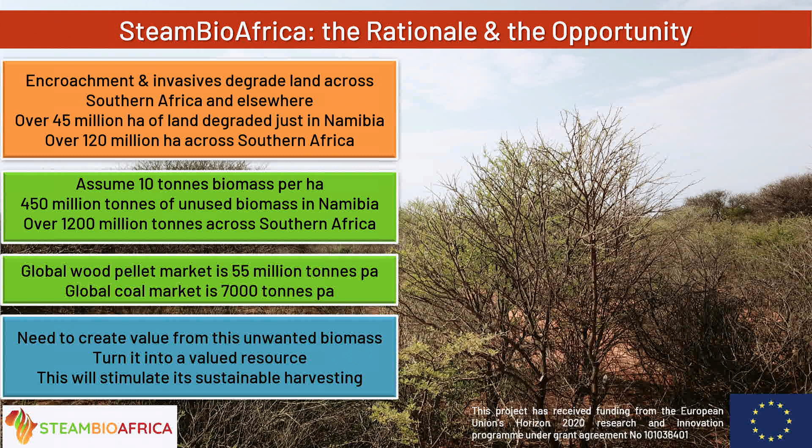So the challenge presented to us, and why we were approached, was can we stimulate the harvesting of that bush? Because at the moment it's a cost, and what we wanted to do was create value from it. That's where this project has taken us forward.

So looking at the situation now in Southern Africa, coal is the primary energy source. It's an unreliable status, it's not very environmentally friendly. There's a lot of rural unemployment, social inequality, encroachment problems, invasion problems, and nothing's actually dealing with that.

So what do we want to do? We want to turn a problem into an opportunity. Now that sounds a bit twee, like out of a business school, but it's a real, genuine thing. We want to turn the problem of the unwanted biomass, the encroacher bush, the invasives, into a clean, secure fuel that can create jobs and address poverty, and we want to do it in a way that benefits society as a whole.

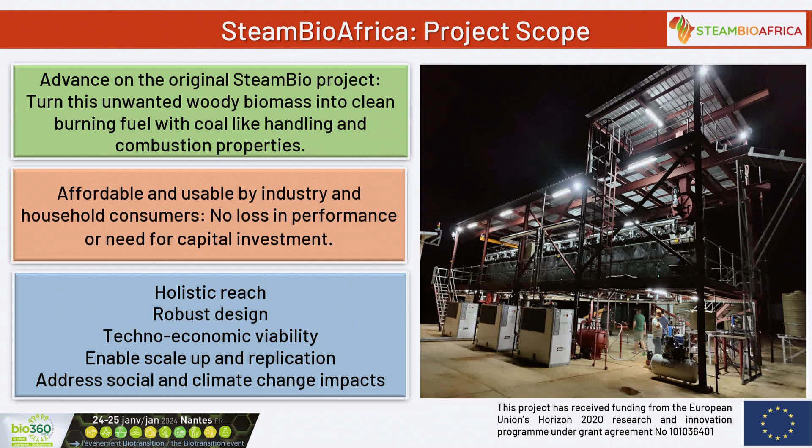So how are we going to do that? We want to take the original project forward. We've built that unit - it's a demonstration unit. We're looking at it not just to prove it on a techno-economic basis, we're looking at full sustainability. Do we leave the land in a better place than it was before? Do we create social benefits? Can we do a good thing environmentally? So very much a holistic approach in this.

If anyone's been involved in an EU project, you have your work packages, all very great. I could go into the details on that, but I think we've all got a limited lifespan. Core things of what we are doing now, other than proving it on all the various aspects, we are currently...

...turning our prototype design into an industrial scale replication. We're talking about taking a system that's currently 250 kilos an hour, which gives an output of nearly 4 tons a day, into a system that can operate at 2 tons an hour as a first commercial deployment. We're also looking at the full business case so that we can roll it out, secure investment, and take it forward.

And this is what it looks like - a nice little demonstration at the Cheetah Conservation Fund site in Namibia. Wonderful place to visit, wonderful to see the cheetahs doing their morning run, hurtling around the park. Really lovely place, but also you see firsthand the level of encroachment because you're in the middle of that encroachment area.

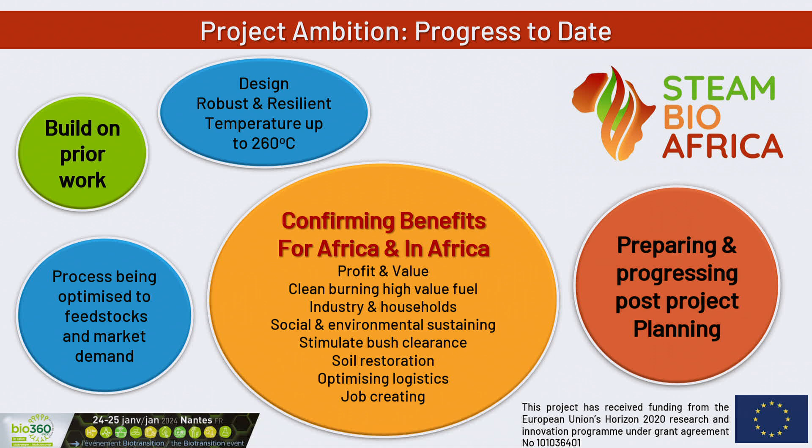So where have we got to? We've built the unit, we're demonstrating it, we're optimizing it. Within the next 6 months we'll have produced over 500 tons of material. That will be demonstrated and validated in communities in South Africa, Botswana, and Namibia. It will also be validated with industrial units - a cement works, a copper mill, and factories, particularly in southern South Africa, who are using coal - and validating it. We have a good relationship with a major manufacturer. We're looking to progress what we're doing into commercial scale rollout.

So what's next? Continue producing, get our 500 tons produced to test, prove that the economics stack up. Lots of people talk about having a great plan, but we actually produce a business case. One of our partners is owned by a green investment fund that's pulled down $60 million US dollars - not Namibian dollars, I should add - in investment in new capital, green capital projects over the past 4 years. We're developing plans for post-project scale-up.

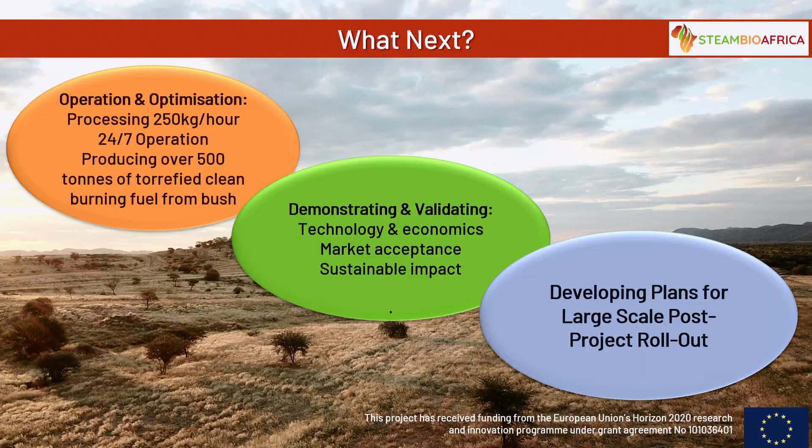As with anything in an EU project, we're looking at quite a few partners - 15 partners, 2 continents, 8 countries, researchers, academia, industry and entrepreneurs. We're all doing fine and everyone's happy with each other all the time... well, not really, but we're working, challenging, and addressing the things. It's a complex piece of work and I think we're getting there.

Thank you. And if you want any more questions, please visit us today or tomorrow at our stand.

Thank you for this very good presentation. Is there any quick question, or should we leave that for a discussion at the end? I can't see any. So, Gang, if you will, continue.

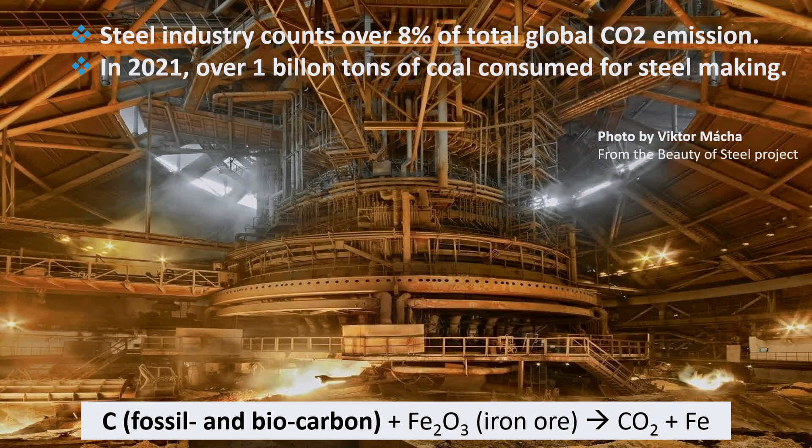Steel industry is one of the most difficult industries for decarbonization. Carbon, especially fossil carbons, is used as a reducing agent in the steel-making process. In 2021, over 1 billion tons of coal was consumed in the steel-making process.

Free allowance in the emission trading system is phasing out for the steel industry, and the carbon border adjustment mechanism has just been implemented since October last year. Those will drive fossil carbon cost to increase dramatically.

Hydrogen can be used to replace coal and coke for steel making. However, converting a conventional steel mill to a hydrogen-based mill will cost 3 to 7 billion euros. So this is happening, but it will take decades. The urgency is already here, so the industry needs a more cost-efficient solution right now.

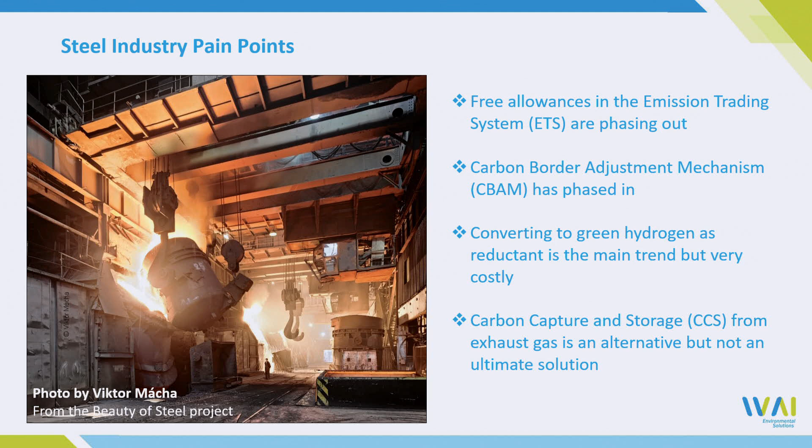Our solution is based on biocarbon. Biocarbon is made of forest residue. Forest residue is one of the most abundant carbon sources on Earth, and it has not been well utilized.

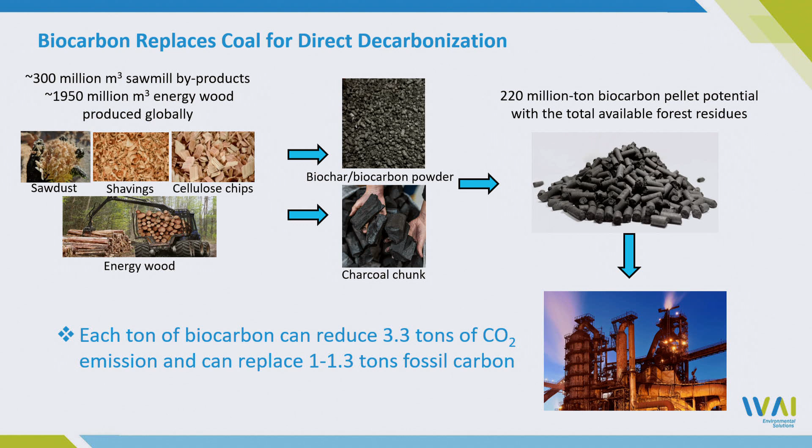Using pyrolysis technology, we can convert forest residue to biocarbon and then use our formula to produce biocarbon pellets. Those pellets share many similarities with fossil carbons, and steel makers can use biocarbon to replace fossil carbon directly in existing facilities without involving too much infrastructure change. One ton of biocarbon can replace up to 1.3 tons of fossil carbon and reduce 3.3 tons of CO2 emission.

First, let's see how fossil carbon is used in the steel-making process. In blast furnace, which accounts for nearly 80% of iron production globally, PCI coal and charged coke are used as reductants. Each year, there are over 900 million tons of fossil carbon used in blast furnaces. For each ton of steel made in blast furnace, average CO2 emission is 2.5 tons.

There's another mainstream technology called electric arc furnace, which accounts for 22% of total steel production globally and 40% in Europe. Since electric arc furnace mainly uses scraps as feedstock, it has a lower CO2 emission than 1 ton per ton of steel. But in total, it still requires 6 million tons of fossil carbon per year in electric arc furnaces.

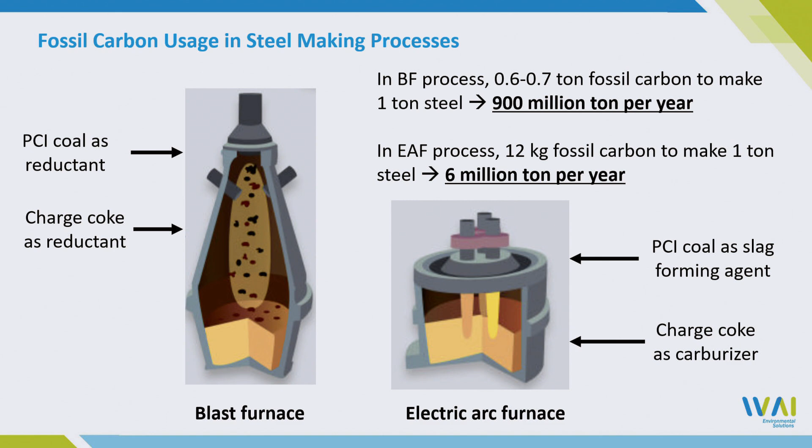If we look at the entire metallurgical industry, steel accounts for 95% of the market size. The other 5% is for ferroalloy production, and many ferroalloy production processes cannot use hydrogen to replace fossil carbon due to thermodynamic reasons. They have to use solid carbon in processes such as ferrosilicon, ferromanganese, ferrochromium, and aluminum production.

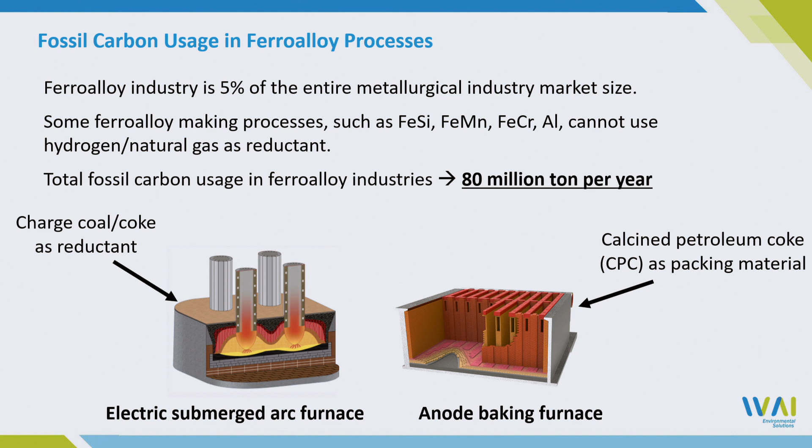Coke and coal are used as reductant. Calcined petroleum coke is also used as a packing material in aluminum anode baking furnaces. So in total, the fossil carbon usage in ferroalloy industries is 80 million tons per year.

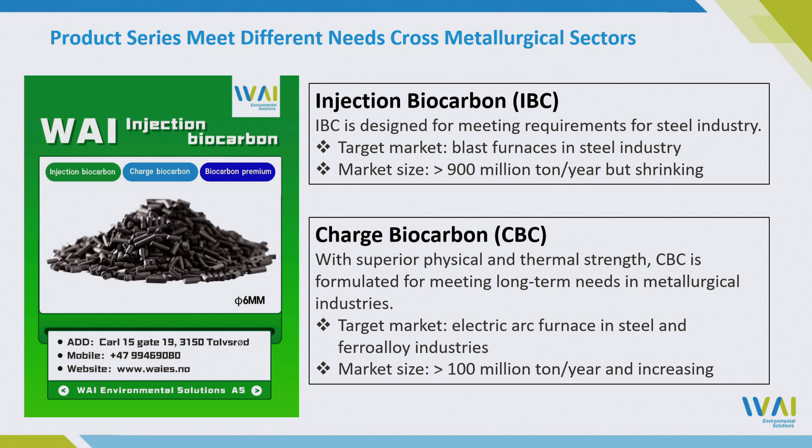Based on what the metallurgical industry needs, we have developed two different products. One is injection biocarbon, mainly aiming for the steel industry for PCI coal replacement, and the second one is charge biocarbon for charge coal and coke replacement in both steel and ferroalloy industries.

For blast furnace, we can use injection biocarbon and charge biocarbon to replace a small part of fossil carbon. But in electric arc furnace, we can use injection biocarbon and charge biocarbon to replace 100% of fossil carbon.

For ferroalloy industry, electric submerged arc furnace, we can use charge biocarbon to replace fossil carbon, and also use charge biocarbon to replace calcined petroleum coke in aluminum anode baking furnace. There's one bonus: if we use charge biocarbon as a carburizer in electric arc furnace, then 70 to 90% of carbon will stay in the steel for many, many years, which makes it a carbon storage technology.

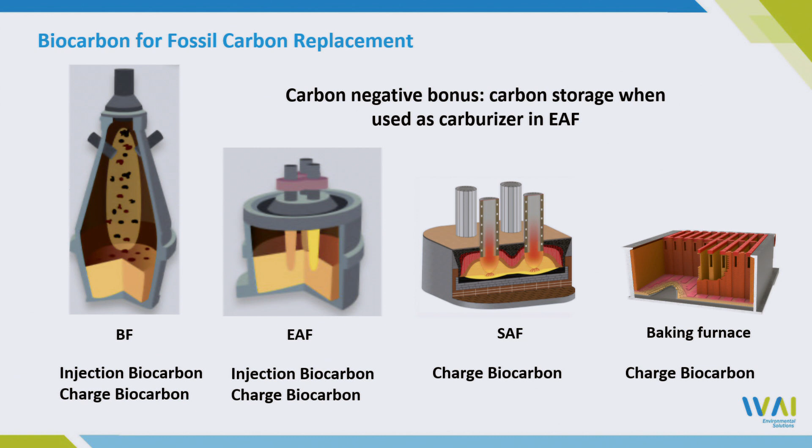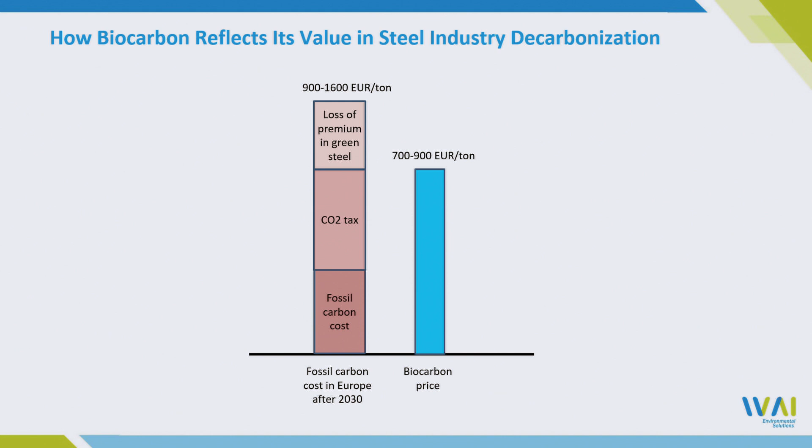Biocarbon will be more competitive than fossil carbon in the near future. For steel makers, they will benefit first without using fossil carbon, which is typically imported from another continent. Second, they can avoid paying CO2 tax. Third, they can gain premium price for the green steel they make with biocarbon.

CarbonWorks is our trademark for biocarbon production facility in Norway. In CarbonWorks, we convert forest residue to biocarbon via pyrolysis technology, and syngas is burned and the heat is recovered as steam and hot water, so we can supply excess energy to a neighbor factory or a district heating network as a second revenue.

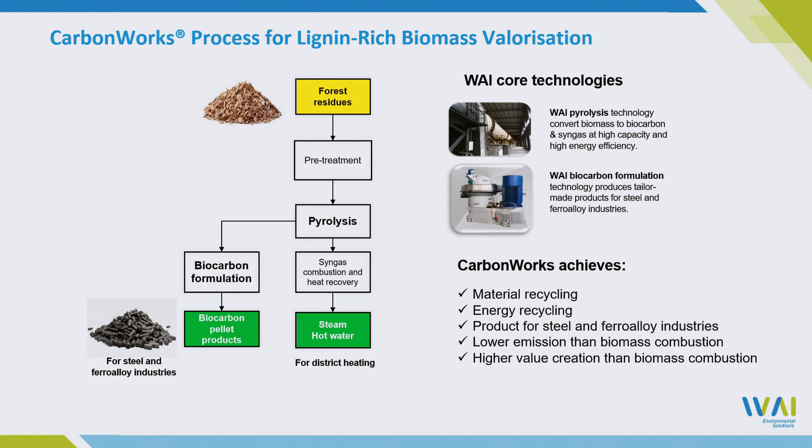But the location of CarbonWorks, for the current CarbonWorks, has to be considered next to a factory, industry park, or urban area due to the heat sales requirement.

So we use pyrolysis technology to balance fixed carbon and volatile carbon content in biocarbon product. The technology we use is internal heated slow pyrolysis. It can be operated at quite high temperature continuously for a long time.

For certain metallurgical sectors, extra low volatile matter is desired, so quite high temperature operation needs to be maintained for a long time. Our technology can also treat different types of materials such as sawdust, wood chips, bark, and wood chunks, and is highly scalable. One full-scale unit can have a big amount of biocarbon production.

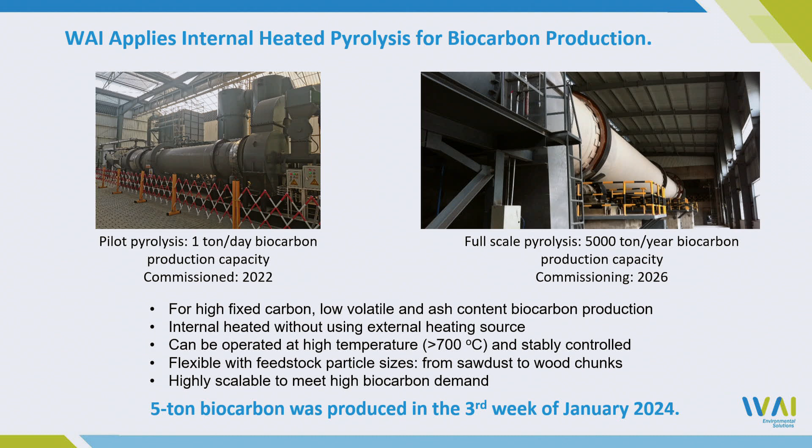Last week, we carried out a trial with our pilot reactor. We produced 5 tons of biocarbon with 3 different types of feedstock, and 4 tons of the biocarbon was produced from Norwegian spruce sawdust.

So pyrolysis is used to balance fixed carbon and volatile carbon. For other properties, such as compression strength, thermal strength, durability, reactivity in furnace, resistance to moisture, and bulk density, we use formulation technology to do the control. The formulation technology combines biocarbon grinding, binder mixing, pelletizing, and hardening steps. We have developed unique binder formula for different product series for different customers.

We can also feed different types of carbonized material, such as biochar, biocarbon, and charcoal. Each unit is designed at quite high capacity and standardized for 10,000 ton output per year. Our first full-scale demo plant will be commissioned by the end of 2024.

Have you heard how beautiful biocarbon sounds like? There's a small video.

So this is a trial we carried out in 2023 with a full-scale pelletizer. Thank you.

Sustainability is very important for the steel industry. It's also key for biocarbon production. We use forest residue only from certified forest material, such as PEFC and FSC. Feedstock security is very important.

We are competing with those companies who burn biomass directly for energy purposes. So the good thing is the EU has launched the cascade principle, which prioritizes material recycling over bioenergy purposes. After Renewable Energy Directive 3 was announced, EU countries will put a new policy to favor material recovery over burning biomass directly.

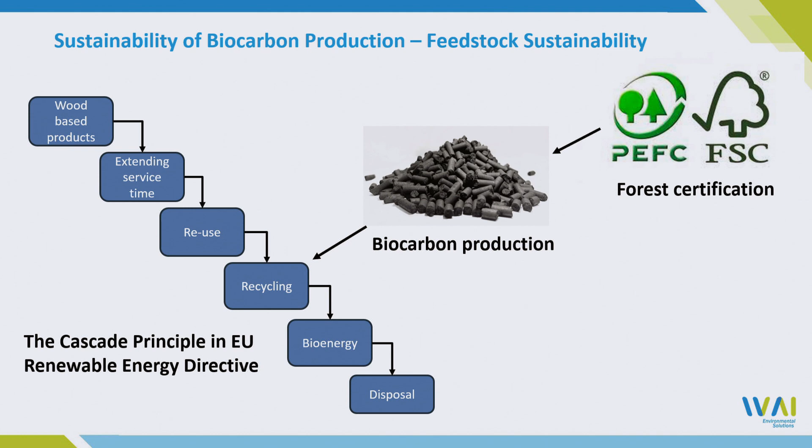There has been a lot of sawmill byproducts sent to combustion plants for energy purposes. This involves lots of truck traffic in sawmills and lots of sawmill byproduct value lost during transportation.

Our approach is to set up a biocarbon production facility in or next to the sawmills. In this way, we can realize material recycling and reduce truck traffic in sawmills by 90%, and also send thermal energy to the sawmill for their product drying. Then they can avoid investment on new boilers.

And we get the biocarbon and send it to local steel makers for fossil carbon replacement. In this way, we empower the entire value chain.

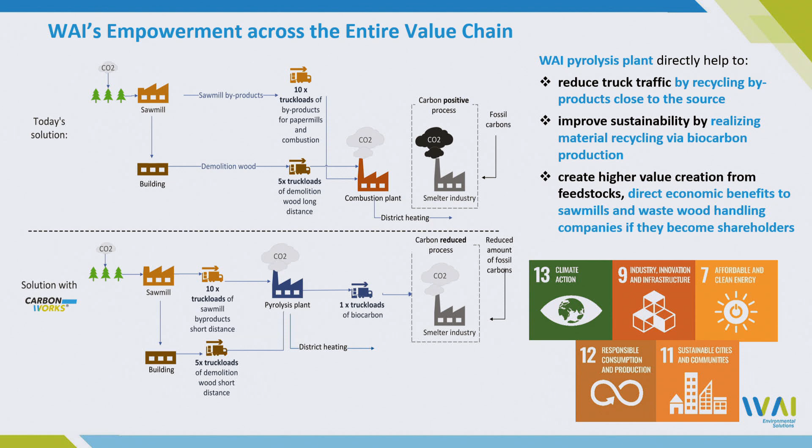We see securing forest residue as very important for our success. So we develop ultimate value creation products from sawmill byproduct and forest residue. On one hand, we upgrade the biocarbon to hard carbon and use hard carbon in sodium-ion battery and lithium-ion battery as anode material.

On the other hand, we upgrade syngas with a fermentation process to protein, and this protein product can be used as a fish feed ingredient. From syngas to protein, the so-called SynoProtein process, is a CCU process with a negative carbon footprint.

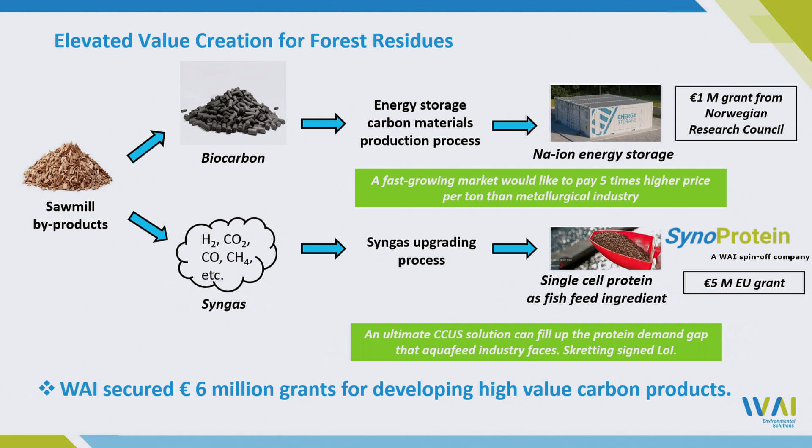Together with a top university and research institute in Nordic countries, we have secured €6 million to develop a new product.

This diagram illustrates how future CarbonWorks look like. Forest residue will first be converted to biocarbon and then upgraded to hard carbon. Part of the syngas will be combusted and supply thermal energy inside the plant. The rest of the syngas will be converted to a protein product via fermentation.

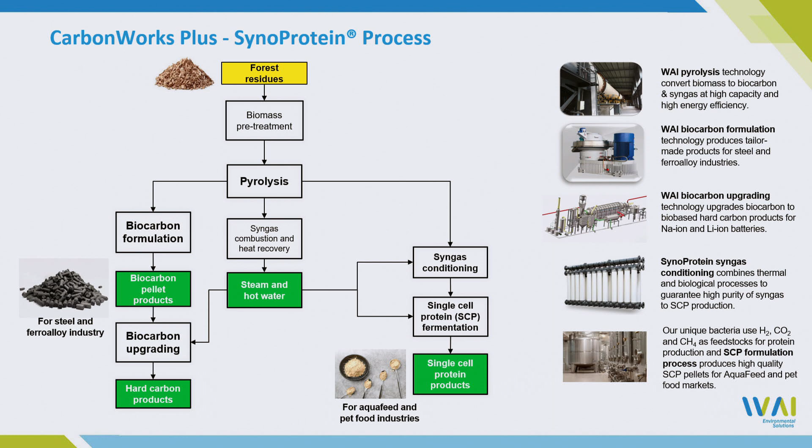In this way, we can have a good energy balance inside the plant, and we can locate our future CarbonWorks to forest residue sources in a remote place if necessary, because we don't have to sell energy to a neighbor factory anymore, and we only transport solid, easy to handle product to our customer.

A little bit about our company. WAI Environmental Solutions is a Norwegian bio-based carbon material technology company, founded in 2017. Now we have a team of 9 scientists, engineers, and business people. Our headquarters is in Tønsberg, Norway, and we have a fully owned branch office in Suzhou, China. We focus on forest residue to biocarbon conversion.

Thank you very much for your attention.

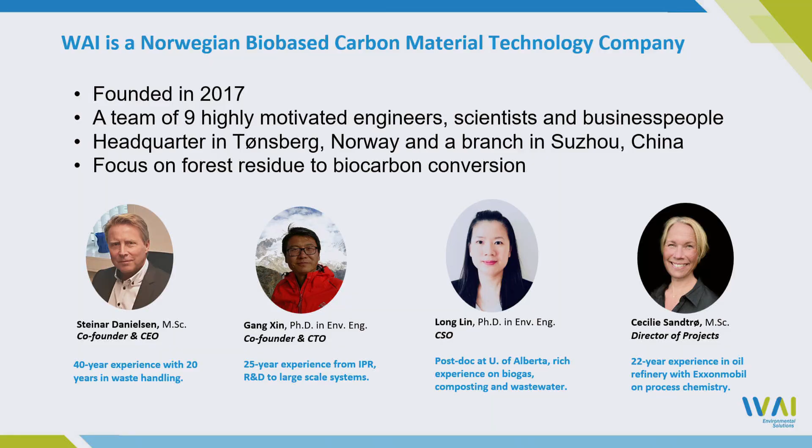Thank you. Thank you, Gang, for this good presentation. Is there any question? Not for the moment. So, Marko, to you.

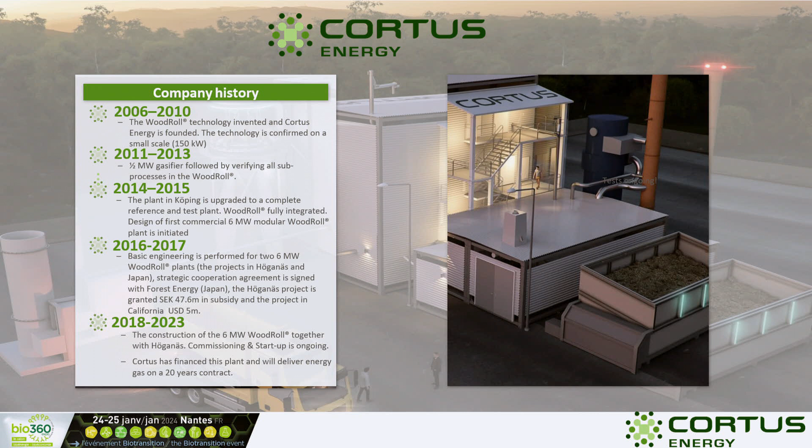The project pipeline at the moment involves interest from all over the world, though our main focus is national, Nordic, and European countries. We are still a fairly small company, 33 employees, where the majority is located in our demonstrational plant down in southern Sweden.

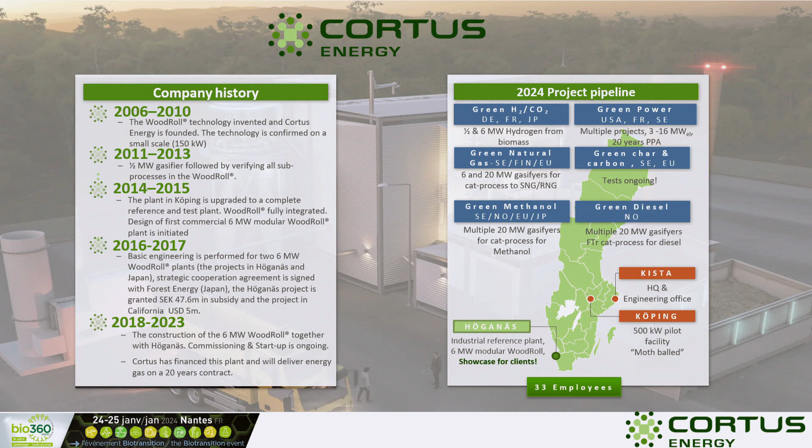The technology itself is a three-step technology where we take biomass, bio-waste. It can come from wood, or it can be a crop, or it can be industrial sludge, industrial waste. We dry it to between 5 and 10% humidity. Then we take the dry fuel and we pyrolyze it, slow pyrolysis at around 400 degrees.

What we then do is grind the char that we have produced and gasify the fine ground char with steam. To provide the gasifier with heat, which operates at 1100 degrees, indirectly heated radiant tubes are heating the gasification.

As it is char steam gasification, it is strongly endothermal, which means majority of the energy from the pyrolyzer is needed in the gasification process. What we then do is take back the remaining flue gas energy to heat the pyrolysis and drying process.

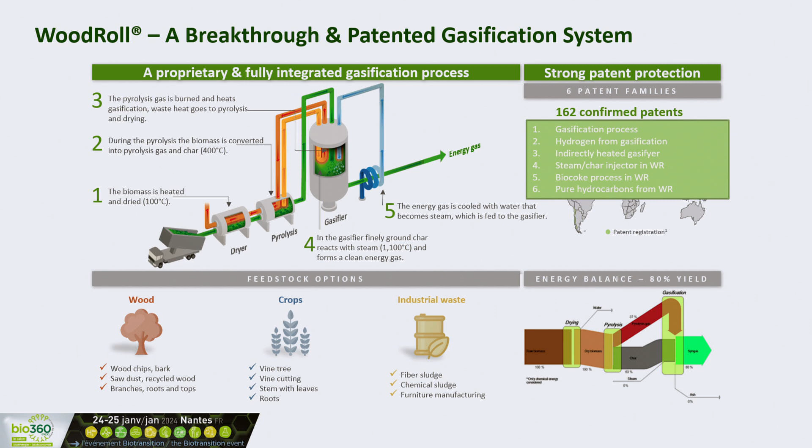We are having patents, different patent families in different parts of the world.

A little bit of the story of where it all started many, many years ago. We see now, when I retroactively look upon it, we were far too early with our technology in comparison to what the market wanted at that point. There was never a chance at 2012 to compete with fossil fuels towards the industrial segment. But anyhow, we were having our pilot already at that point.

So through several steps, we went from gram level together with university to go up to 150 kilowatt scale. At that point, it was basically grinding made with the type of grinders that you grind food with at home.

Later on, we went to a 0.5 megawatt pilot unit that we built in different steps until it was fully integrated around 2016. Now we are having a demonstrational unit down in southern Sweden, as I mentioned, where we have about 20 persons employed.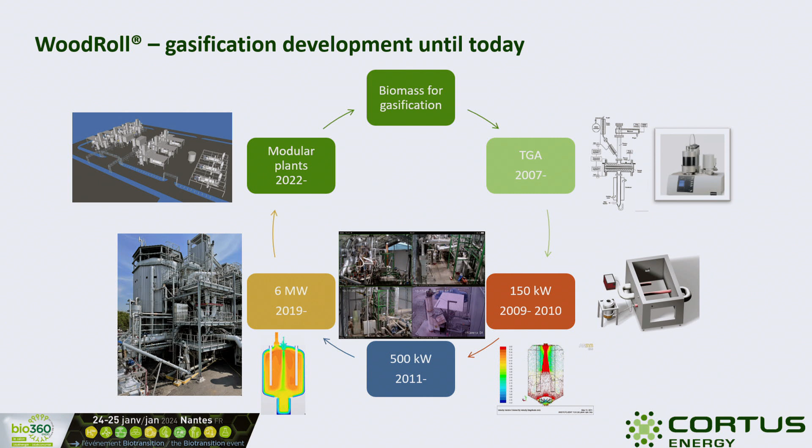The best thing with our technology, I would say, is when we scale up and when we use it for catalytic applications. As we are only using steam as oxidizing agent, there are no traces of nitrogen in our gas. And as we are also operating gasification at such high temperature, there is no need of cleaning downstream the gasification process.

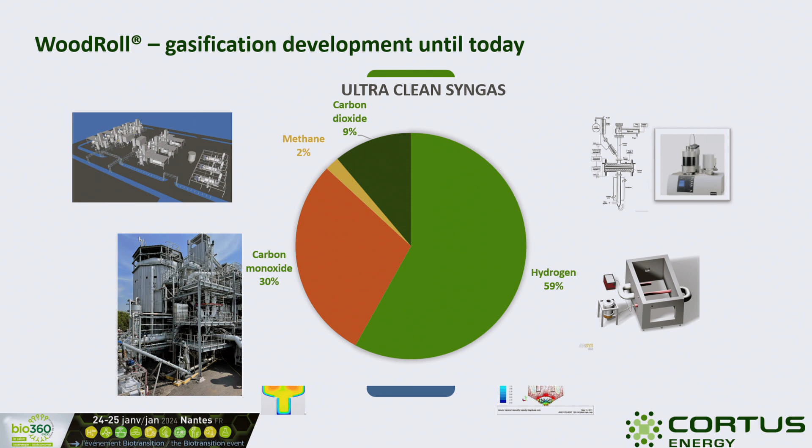Biomass gasification is definitely key of a renewable future, and now perhaps there is also a timing in the market that is to our benefit. As you heard here before, there is a strong need, and the time is very close when it is not just good to reduce your emissions, it is a necessity for many industrial sectors.

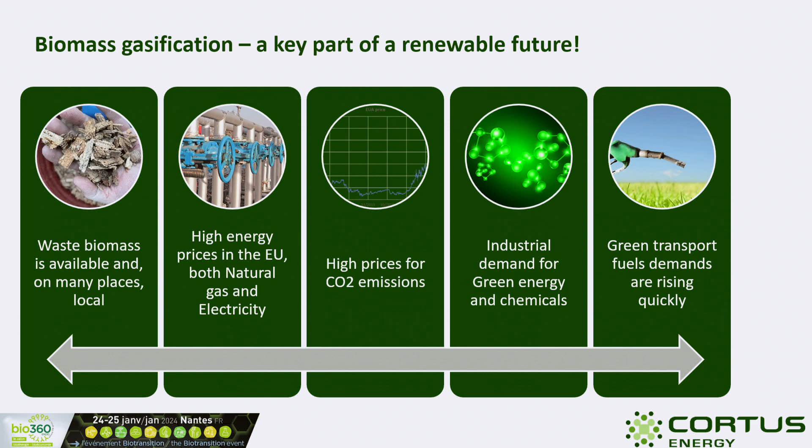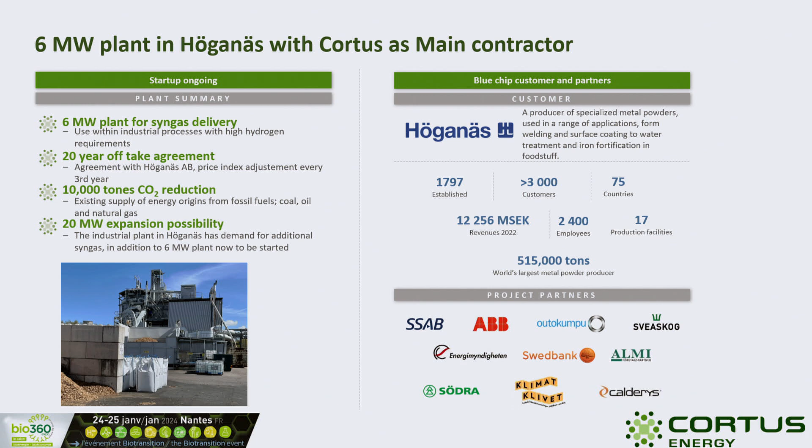A little bit about the Höganäs project. It is a 6 megawatt plant for syngas delivery. We are replacing natural gas. Höganäs AB is the customer. It is a pipe replacing the natural gas that they are using today, and we have received grants for building this plant from different project partners.

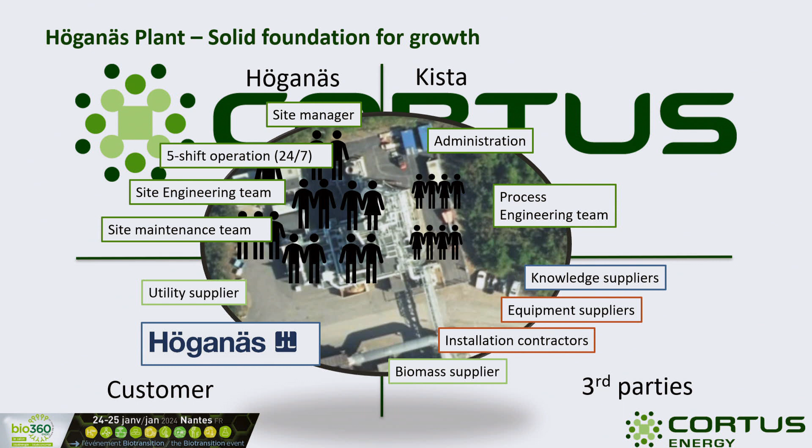The organization on site is a 5-shift, 24/7 operation. We have a site engineering team and a site maintenance team. Also, for analysis, there is support from our main office in Stockholm, where we have the process engineering team. And of course, the key is also our customer.

What have we then done during 2023? We are still not in 11 months per year operation, which is the final goal. We are today operating daytime. We are going over to 24/7 operation. The reason is that we have needed to educate the 5-shift from the customer as well, to operate the furnace with syngas, as they normally only operate natural gas.

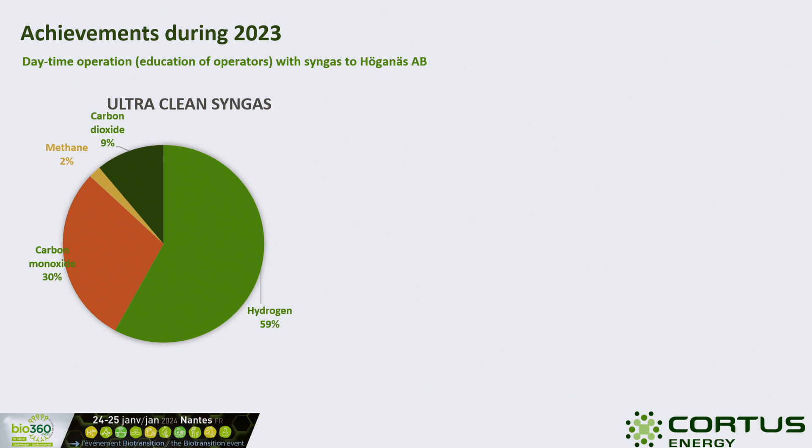What we also have achieved during the last year is biochar. Biochar is something that really didn't exist when this plant was built. Now I'm talking about biochar for ground purposes, not for coking purposes that we also heard here before. But over time, we realized that we do have a capacity. We are already producing char as a part of our process, and all of a sudden a market has come up that really didn't exist. So we went through certification. We also, when we see issues in the plant in the gasification part, we can continue on to produce biochar. So during the last year, when we were at standstill during the summer, we produced around 150 tons of biochar. So this is really a possible product out.

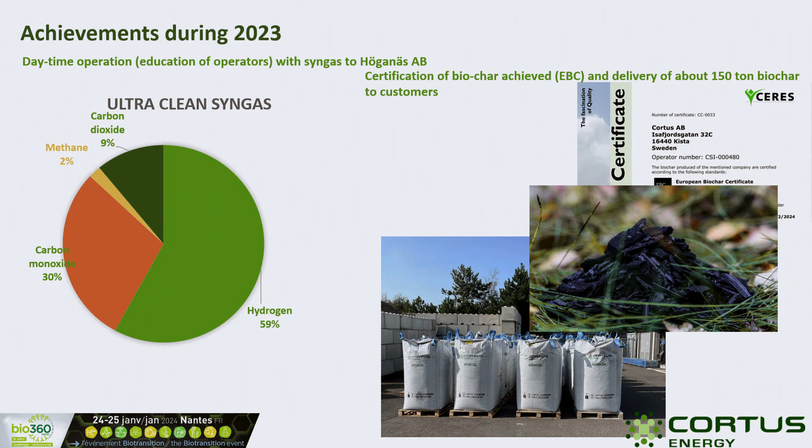Some other historical achievements: we have historically also produced biocoke for metallurgical applications. As you heard before, we need to heat treat it to higher temperatures to reduce the volatiles. We also need to compress the biochar as it has too low density. This part has not been done by us, but by steel partners before testing it.

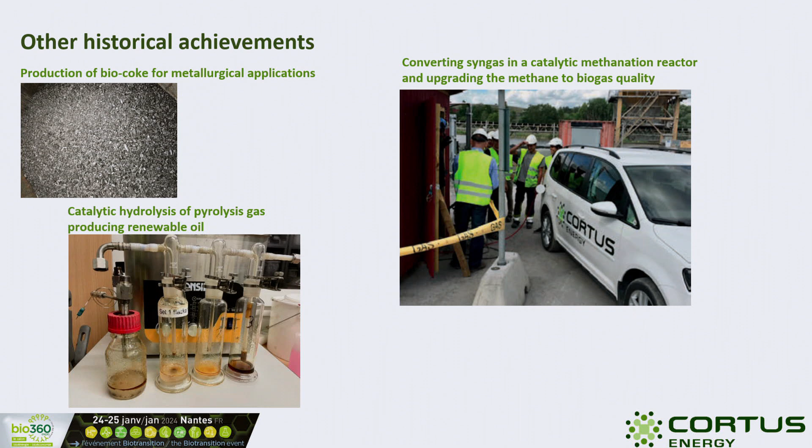We have also, with the syngas composition you saw, upgraded it historically and converted it to biomethane through catalytic reactors, upgraded it and compressed it to fuel one of our biogas cars.

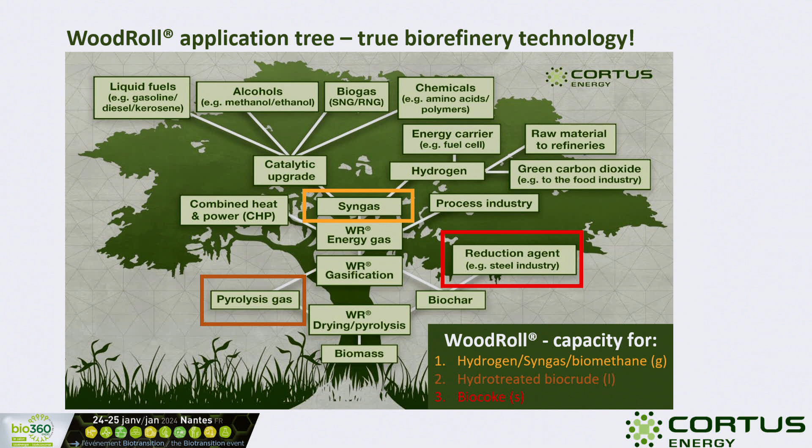A little bit about the modularity and where we see ourselves. Well, we see ourselves as the stem, and this is our core technology. So the biochar is not even in one of these squares, as a fertilizing agent. We have the possibility of increasing the temperature more for usage in the steel industry. There is a possibility of utilizing the pyrolysis gas in the future, but our main target where we are right now is the syngas itself. The syngas itself down in Höganäs is used to replace fossil gas in process industry, but over time the most benefits are seen from converting it catalytically to more valuable fuels, such as alcohols or liquid fuels, or even chemicals.

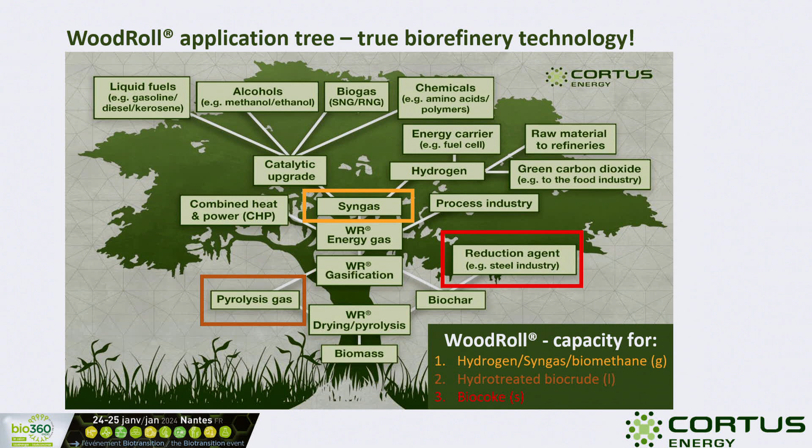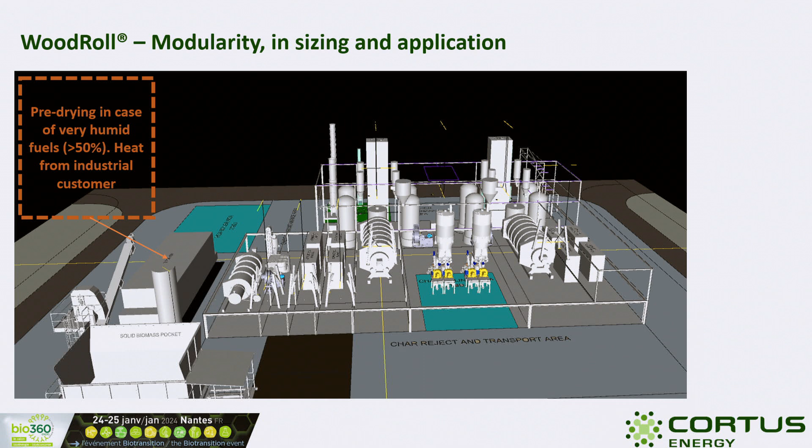A bit shortly about how we see our projects. It is, of course, every time dependent on the type of fuel and the case the customer has. The cost of the fuel is by far the main cost of the OPEX of this type of plant. So pre-drying may be necessary. For that, it is very beneficial if there is surplus heat, if we are located at an industrial customer.

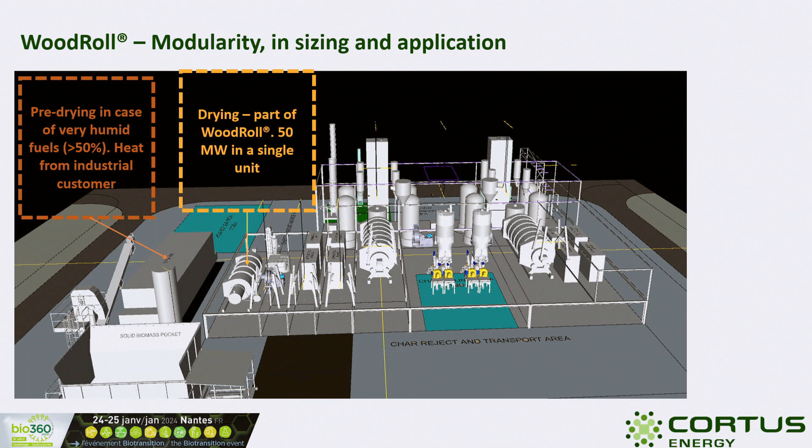Drying can be scaled up conventionally up to 50 megawatt units. We spoke about the 6 megawatt that we have as demonstration. The pyrolysis, which is the heart, we already see that at a 25 megawatt unit. And really the bottleneck as of today in our technology development is the gasification units, and it is really the heating of the gasifier, the tube heating of the gasifier. We are today at 6 megawatt level.

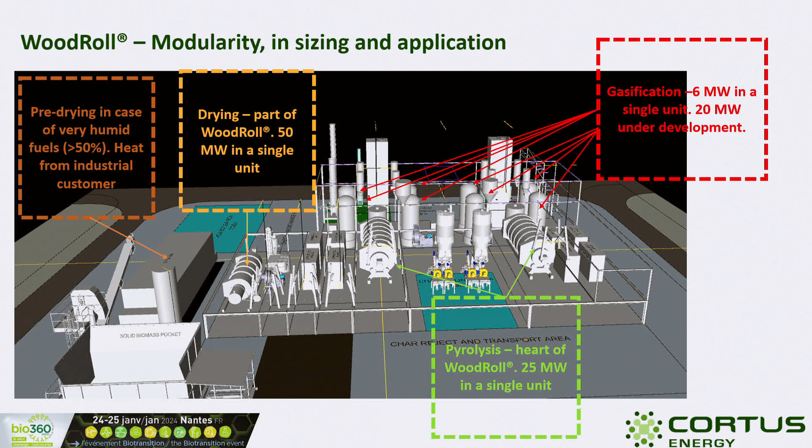We are having 20 megawatt under development for scale-up. This is basically needed because we need the scale if we are about to use the syngas for catalytic processing, as downstream proven processes such as Fischer-Tropsch are very costly. So they have a hard time today competing at the 6 megawatt scale.

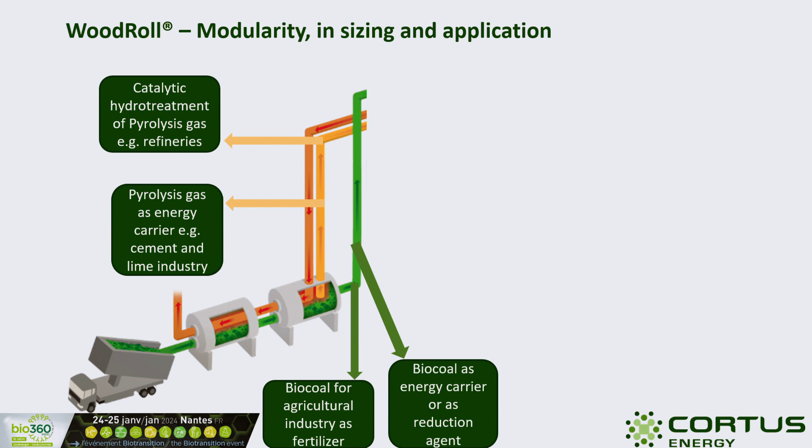A little bit about the type of plant we can have. I wouldn't have considered this five years ago as an option, but over time with biochar, we've seen more industrial applications where there isn't a need for the clean syngas we're producing. It may be enough to reduce capex by having a much simpler plant. Then, of course, there's the possibility of the full application where we produce syngas for different types of processes.

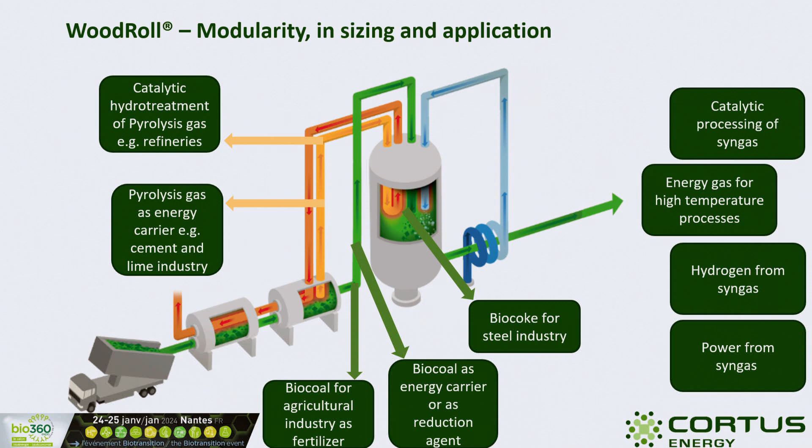That was all that I had. Thanks a lot.

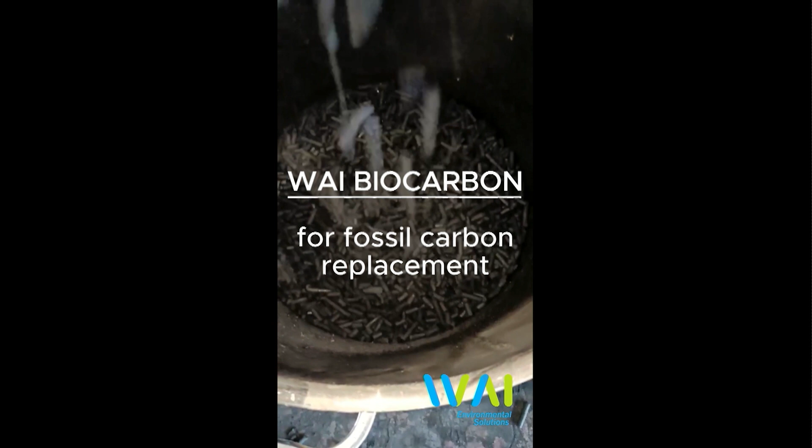It's always hard to ask.